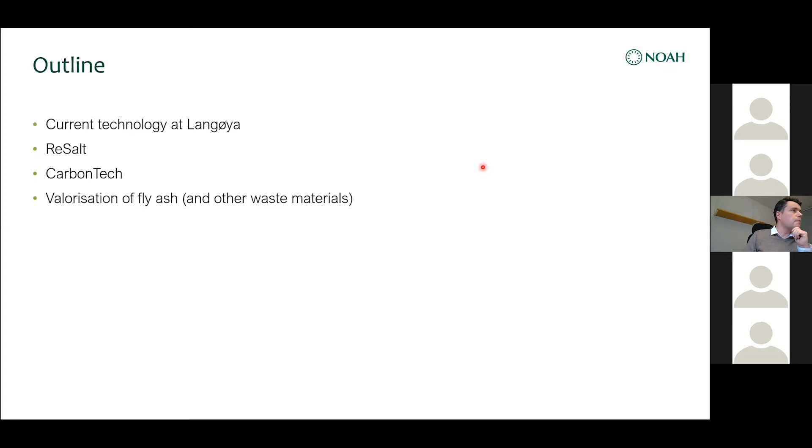And finally, I have one slide on valorization of fly ash, where I want to at least present and discuss some possibilities, but also maybe some challenges using fly ash as a raw material into other industries. I assume most of you have seen this slide before, but let's go through it again, just to give you a background.

Our philosophy in NOAH is to use waste to treat another waste, so we don't purchase a lot of chemicals. The only chemicals we buy in is for the water treatment. The rest is actually waste material. And our 2 main waste streams are acid, which is sulfuric acid, a waste product from Kronos Titan in Fredrikstad, where they produce titanium oxide, which is a white pigment. And after this process, we get sulfuric acid, and the concentration is around 25%. And in numbers, we're talking about 200,000 cubes per year, so it's quite a lot of acid.

The other big waste stream is fly ash. We receive approximately 300,000 tons of fly ash each year. And the alkaline acid ratio here is almost in balance. The fly ash here is slurified with water and pumped into our neutralization plant, where we mix it with our sulfuric acid. And out of it, you get precipitation of gypsum. And also into this neutralization plant, we can add other kinds of industrial waste. This could be wastewater, other kinds of acids, and also alkaline material, as slurries.

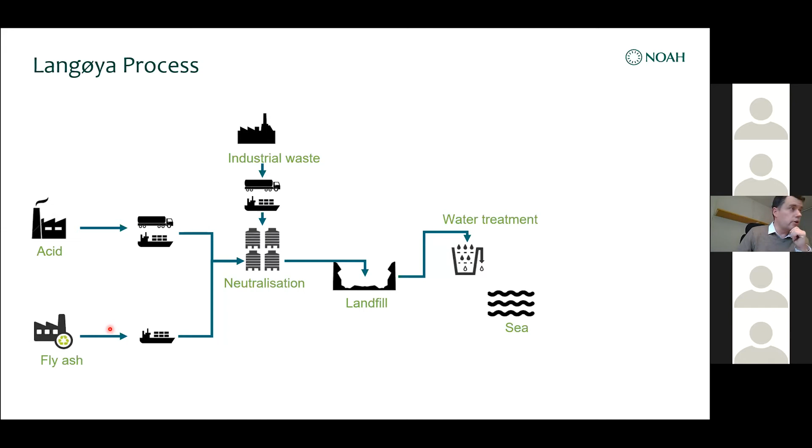When we're talking about salt, the process will be very similar up to gypsum slurry, but there is a necessity to implement a press filter, so we can separate the brine from the filter cake. And now we are doing a feasibility study to invest and implement a press filter at Langøya. Just a few words about the filter cake. We have done a lot of tests. The leaching is very, very low. And hopefully this can be a product in the future. I'll come back to that on the last slide.

The other good part about this is that the volume occupation of this filter cake is much less compared to gypsum slurry. So we can increase the lifetime of Langøya considerably. Well, the other stream out of the press filter is brine, obviously, and this brine will go into a process plant where we have to clean it before it goes into a recycling plant. And the main challenge is sulfate, because we don't want sulfate to co-precipitate with the other salts. The metal content is very, very low because this process is very robust. So the clean brine will go into a recycling plant to recycle the chloride salts. The sludge here can either be recovered or go into a landfill.

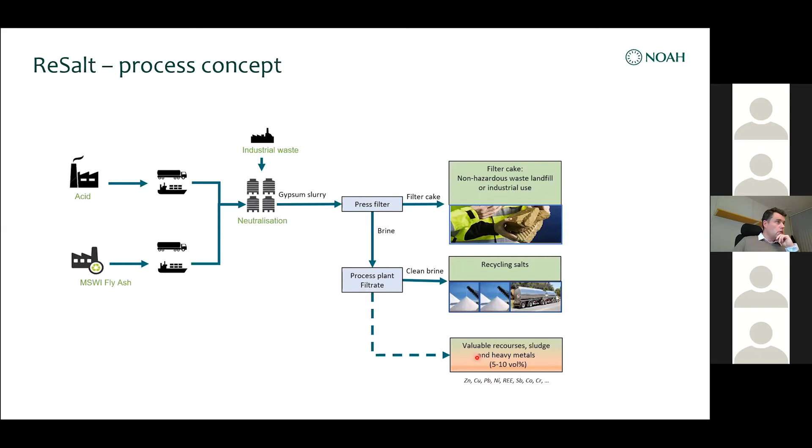When it comes to salt recovery, we are now in the phase of building a pilot plant. This is a 3-year project. The total budget is around 30 million NOK. And the main goal is to verify if we can meet the industry standards of pure sodium, potassium, and calcium chloride. That's our goal, because we want to make industry products out of this. We have divided the project into 3 phases.

The first is to make as concentrated brine as possible after the press filter, because our technology is based on evaporation. So the more concentrated the brine, the less water we have to evaporate and the less energy we have to put into the system. So this is a really important step. The next one is cleaning the brine before it enters the crystallization plant. Since we can control the pH of our gypsum and our brine, the heavy metal content is very low. But as you may know, working with fly ash, you have a lot of sulfate in it, and the solubility is fairly high. So we are now working on how to reduce the sulfate concentration and to what level, which is the target. We don't know yet.

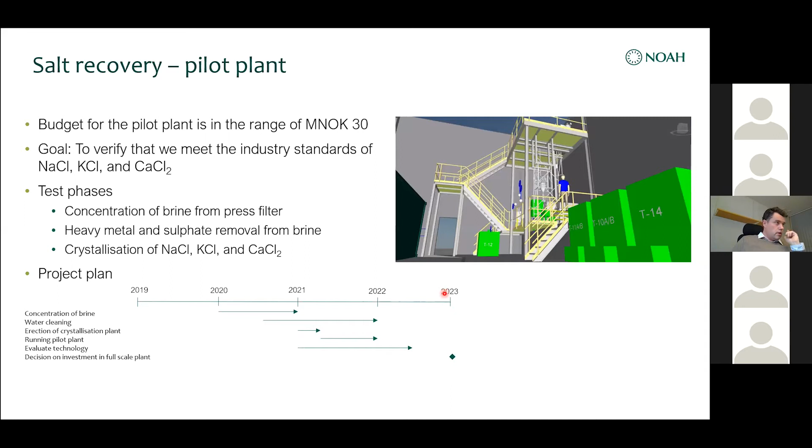Approximately 2 months of erection, and then we will do test running the rest of 2021. Maybe a bit longer, it depends. Meanwhile, we have to evaluate the technology, and the goal is to make a decision on whether we invest in a full-scale plant or not in beginning in 2023. This is the technical part. We also have a commercial part, obviously, here.

These are potential partners in a salt recycling, let's say, economy. Our main input. This represents our salt factory in the future, full-scale salt factory. The main input of salts obviously will be from fly ash, from Norway, Sweden, and Denmark.

And the input will be calculated between 600 and 800,000 cubes per year, with a salt content in between 10 and 15%. And the total output just based on fly ash is in the range of 80,000 tons per year. And that is spread over sodium, potassium, and calcium chloride. To make the economy a bit more robust, we are also looking at other waste material containing salt. So we are looking into that now. So this is the market part of this project. But at least we think we can produce 80,000 tons of chloride salts separated.

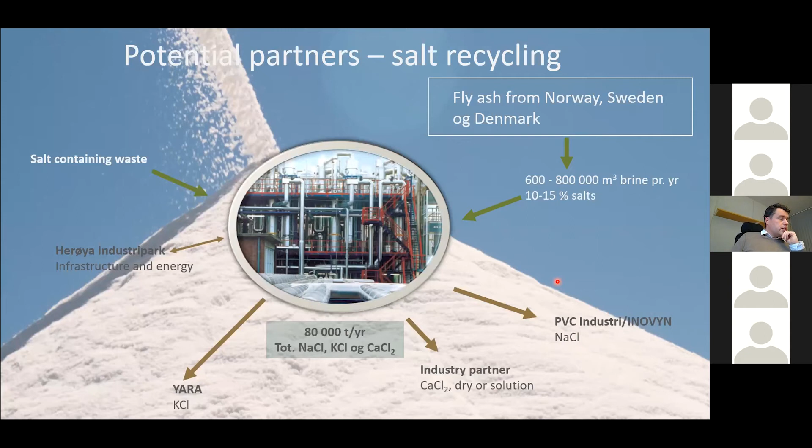Also in the same area as Herøya Industripark, you have INOVYN. They produce PVC, and they use a lot of sodium chloride. So we've also been in contact with them to see if they can be a customer of our sodium chloride salt. That is the salt. Then I move on to what we call CarbonTech.

Accelerated carbonation of fly ash is an extremely effective method of reducing leaching in fly ash. Now we are using sulfuric acid to stabilize fly ash, but you can also use HCl or CO2. The mechanisms are more or less the same. And this process is based on that you can use flue gas from any kind of incineration as a source of CO2. So this process can be located in the vicinity of any flue gas emission point. So it's very flexible in that sense.

And what is also important to us is that we can combine the carbonation of fly ash with salt recovery, because we can stabilize the fly ash first and then recover the salt later on. Always when we look at processes, we do life cycle analysis, and we have also done that for the salt project, and it looks very good. This process is also overall CO2 negative. It means that we can capture more CO2 than we emit, including transport and the energy of the process. So it's a permanent capture of CO2.

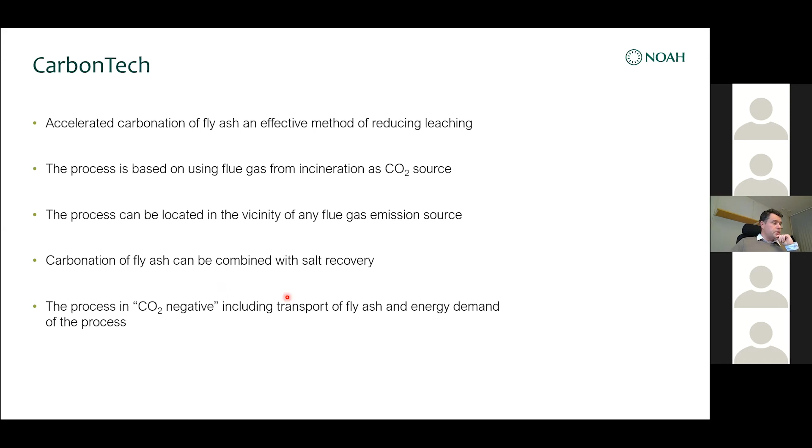At Langøya, we have a large test center where we do a lot of things. When it comes to CO2 process, we have two processes we're looking at. To the left here, we have what we call the dry fly ash. It's actually moist. We add some water to the fly ash and then mix it with flue gas. We can mimic flue gas at Langøya. We have a small incineration plant where we use wood for making CO2. And this is a very, very fast process. The kinetics in moist fly ash combined with CO2 is very fast. And here we have a picture where you can see carbonated fly ash.

The positive side also here, you don't need a lot of water cleaning because you just add enough water to make the fly ash moist. So it's a dry process and fairly simple.

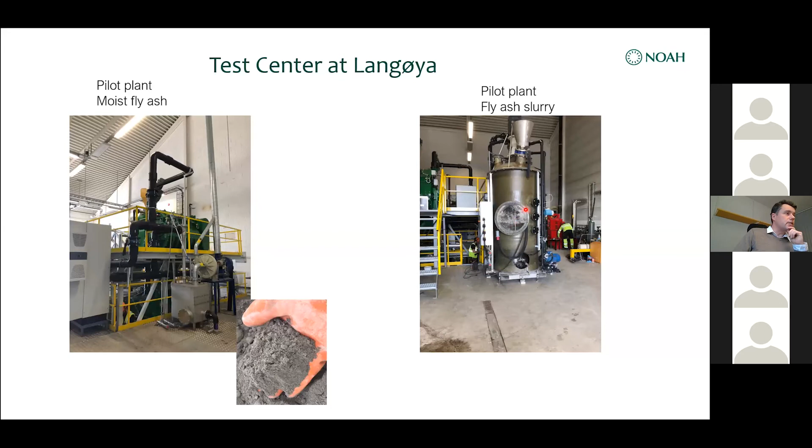To the right here, we have another process where we do the carbonation in a slurry. The kinetics in the slurry is much slower, but we have invented a system where we make a huge area of the bubbles such that at least the kinetics of the carbonation is acceptable. Here, obviously, we have to clean a lot of water, but the good part is that we can separate the salts from the carbonated fly ash just with a press filter. So it's easy to combine with our salt project.

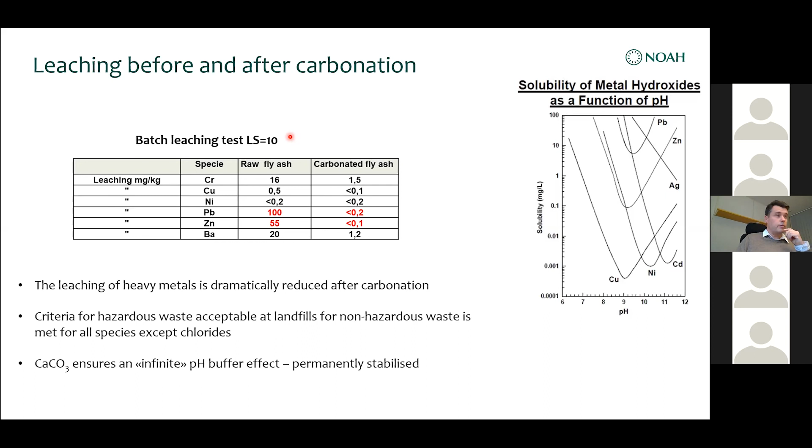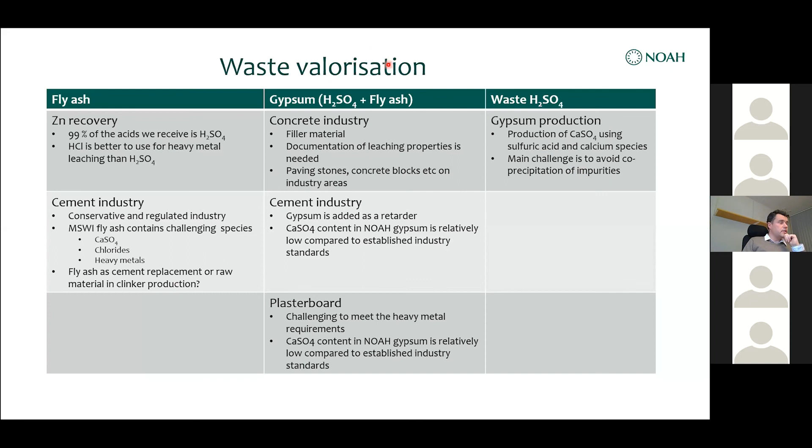When it comes to our sulfuric acid, we are looking into whether we can produce gypsum using our sulfuric acid and calcium species, because hopefully the coal-fired power plants will shut down in the next 20 years, and there will be a need for calcium sulfate in the market. So hopefully we can make pure calcium sulfate from our sulfuric acid. The main challenge we see is to avoid co-precipitation of impurities along with the calcium sulfate. But I think that can be solved by doing it properly and controlling the pH. So this is our view on waste valorization of fly ash compounds.